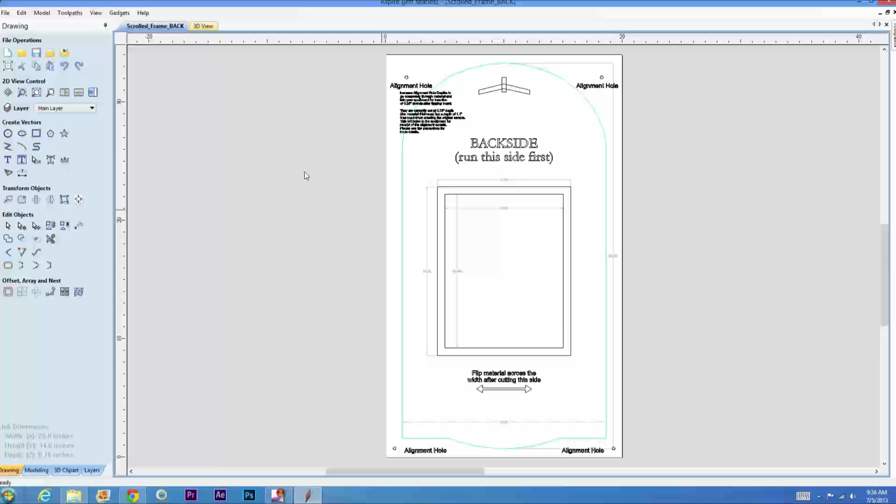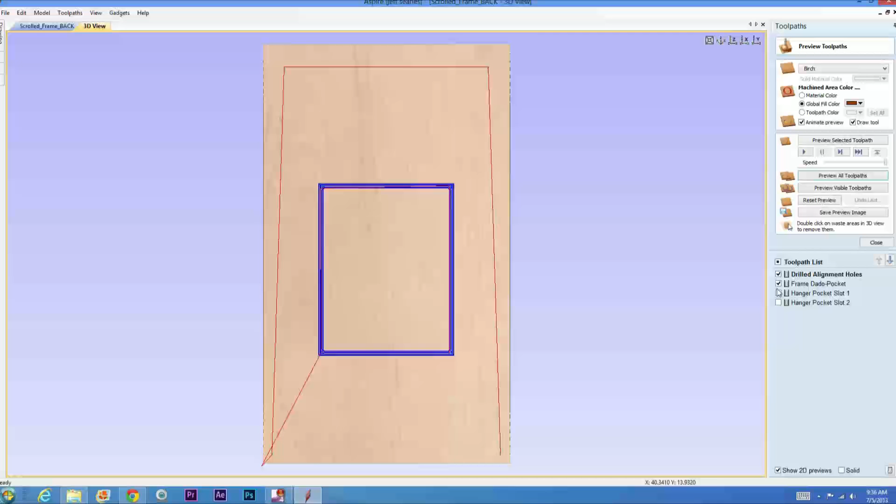Once you see that your machine has the capacity to cut that out, we shoot over here to the Toolpaths tab. They're already generated for you, and you can click here to preview the toolpaths. We'll go ahead and preview them all - as you see here, this is showing us exactly what's going to take place with the CNC. Let me do that one more time. Again, this is just the back, not the front.

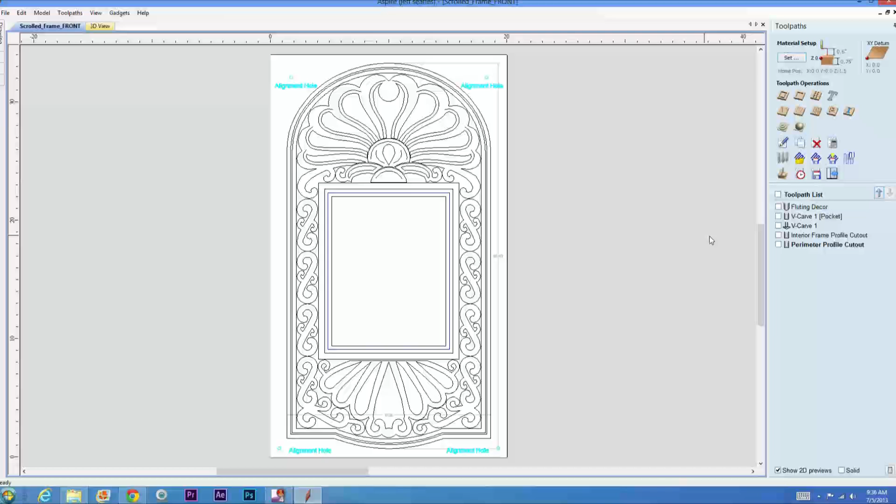Let me go ahead and close that, and close Aspire. Let's pull up the front, because I think you'll get a little bit more enthusiasm from the front. Same thing, we're going to check our dimensions - 20 by 34, CNC can handle that. Come over here to our Toolpaths tab, preview the toolpaths, and preview them all.

This is what's going to take place on your CNC machine, and I have to tell you, what you see here on the screen is what it's going to look like when you cut it out. Here in this corner, you can select your different woods - for example, if you're using some mahogany, that's what it's going to look like.

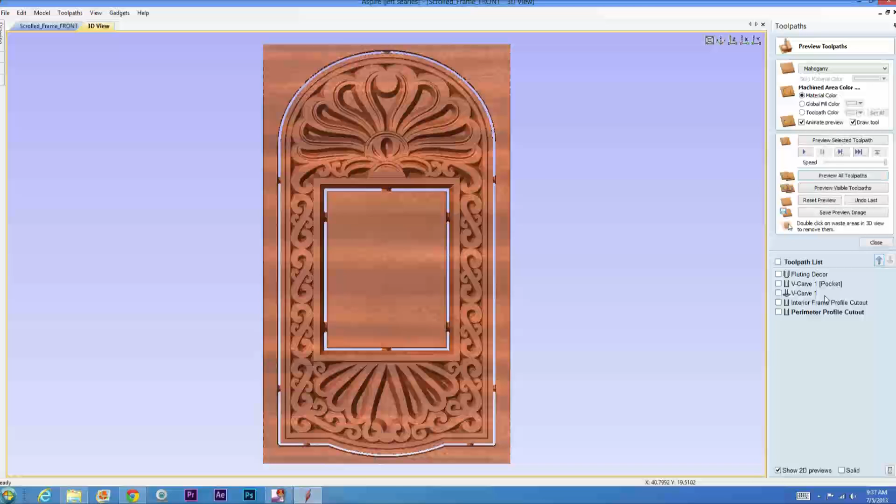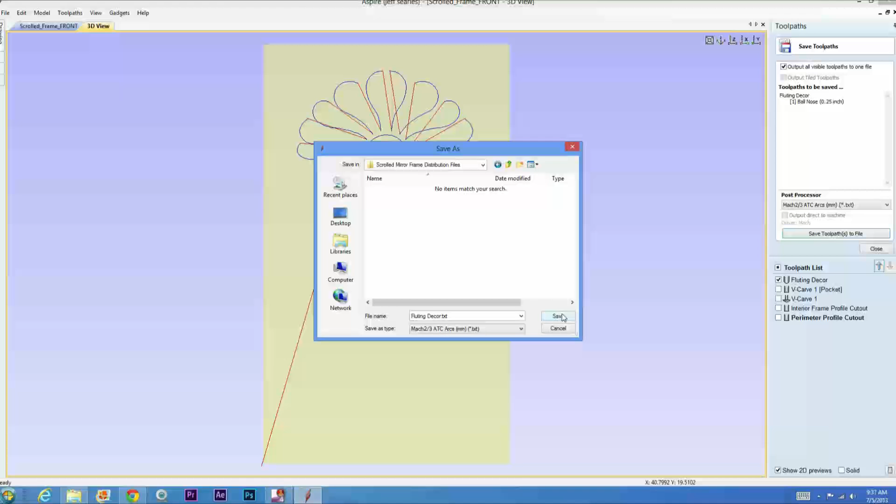Then what we want to do is come through here and save our toolpaths. We'll start here, that's the first toolpath, and save it to file. Tell Windows exactly where we want to save it, go to the distribution files for the scrolled mirror frame, and save the fluting decor toolpath there and click Save.

Then we're going to unclick the fluting, go into the V-carve pocket, save that one to the same place. Then unclick that, click the next one, same place, and we'll finish these last two and your final perimeter cutout.

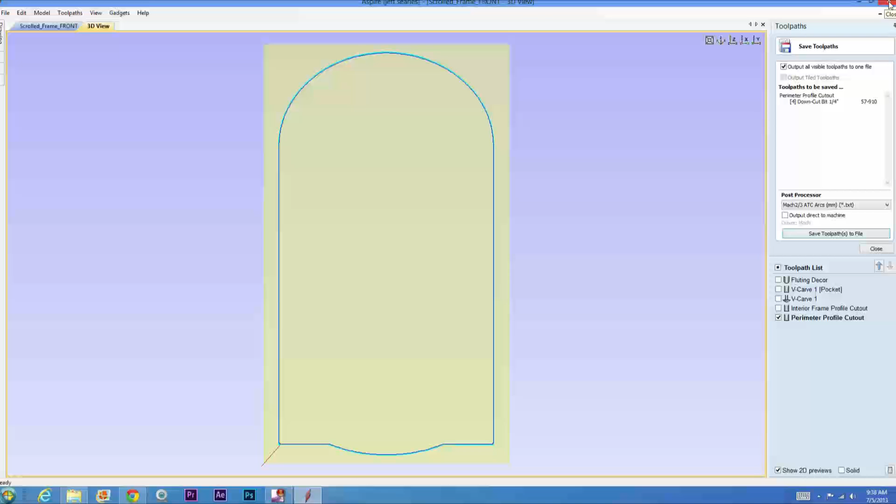And I forgot to mention, right here is your post processor - I'm using Mach 3, and this tells it which kind of post processor we're using when saving. So all your toolpaths are saved. We're going to close without saving the changes, and then come over here and launch Mach 3.

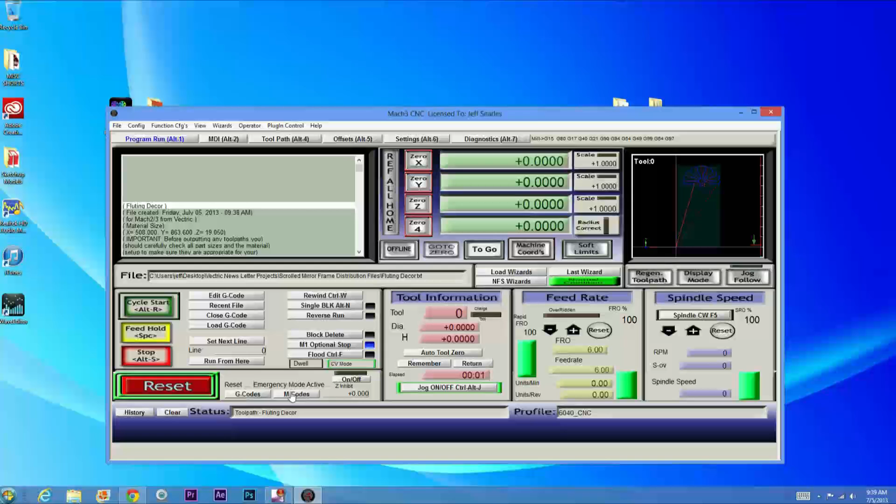There are also lots of places out there allowing you access to free files that already have all the toolpaths and everything. For me, I'm not a real designer guy. When I pull up Aspire and want to create a new project, sure, I can tell it I want it 9 inches wide, 12 inches high, 3/4 of an inch thick, with zeros in the corner. But then what do I do? I'm not an artist, I'm not a drawer. I can import some models, and we'll show you how to do that in a later tutorial. But this once a month free project is great.

That's all I got for today. We're going to be coming back later in the week to do some wood turning on the lathe. But I wanted to take a minute because I spoke about it in the last video, how easy this was for the monthly newsletter projects. I wanted to give you folks the opportunity to have a look at that. So thanks again for watching. Jeff, Work Against the Grain.